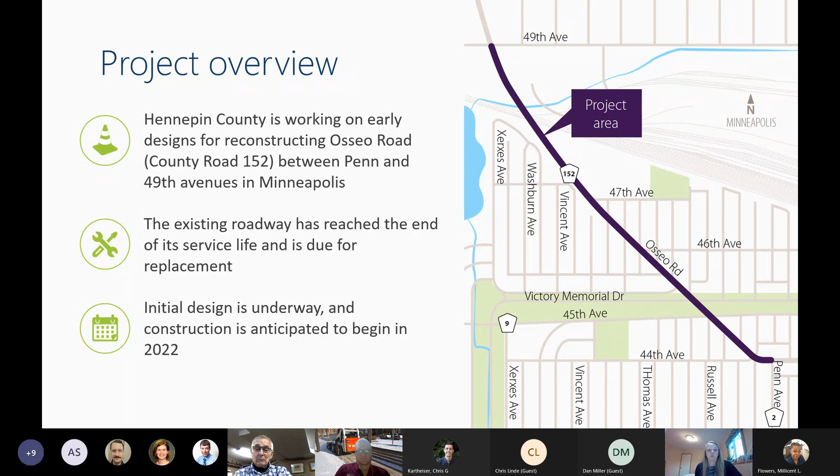The initial design, which was developed based on community input and technical considerations, was presented back in July via virtual open house and here at the August BAC meeting. After reviewing some of the feedback that we received from the community and working with our project partners, we have made some modifications to the typical sections and the geometry, which I'll be presenting to you in these next few slides.

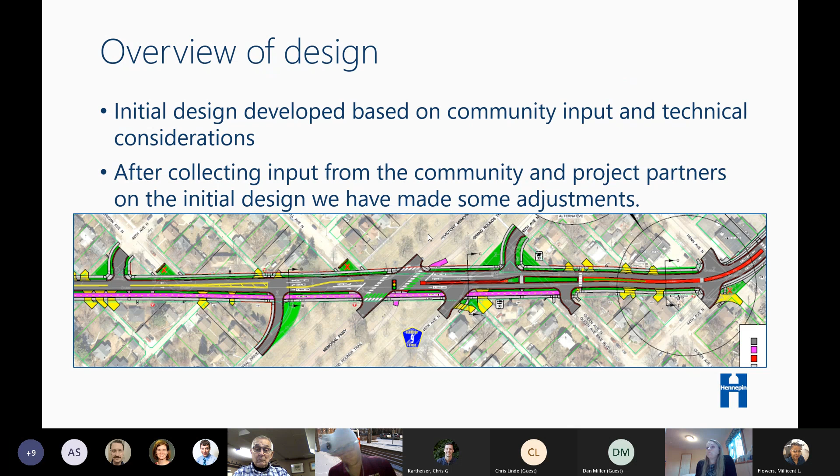With Osseo Road being a very diverse corridor of businesses, residential, and the regional trail, we kept the corridor separated into 6 major roadway typical sections. The major change in our typical section is that we are transitioning to a single trail on the west side and adjusting to 2 sidewalks along either side of Osseo Road.

Next we'll jump into some of these typical sections. Starting on the north end, this left typical section, we are matching into the existing roadway with 2 11-foot travel lanes and both left and right turn lanes at the 49th Avenue intersection. The part that is changing: we have two 5-foot boulevards. We are providing a 10-foot trail with a 6-foot sidewalk with a 1-foot detectable edge between them on the west side, and a 6-foot sidewalk on the opposing side.

On the next section, the right typical section, this is our bridge typical section. We are keeping the 2 11-foot travel lanes with outside 5-foot shoulders, which is unchanged from our original geometry. What has changed is the 10-foot trail with the 6-foot sidewalk, the 1-foot separation, and on the opposing side, again the 6-foot sidewalk.

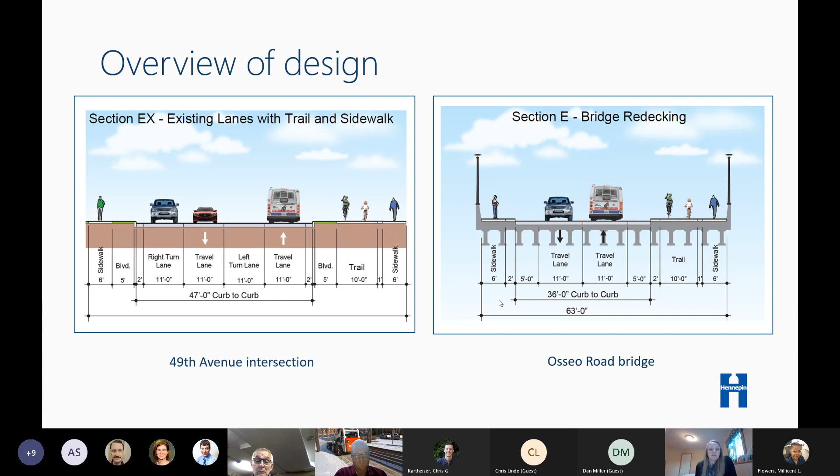The next section is our main roadway section, this highlighted green piece. Here we are replacing the in-place 3-lane section and outside bike boulevards with two 11-foot travel lanes, same as the previous design. What's changing is the two 5-foot boulevards with the 10-foot trail, 6-foot sidewalk with a 1-foot separation, and on the opposing side the 6-foot sidewalk.

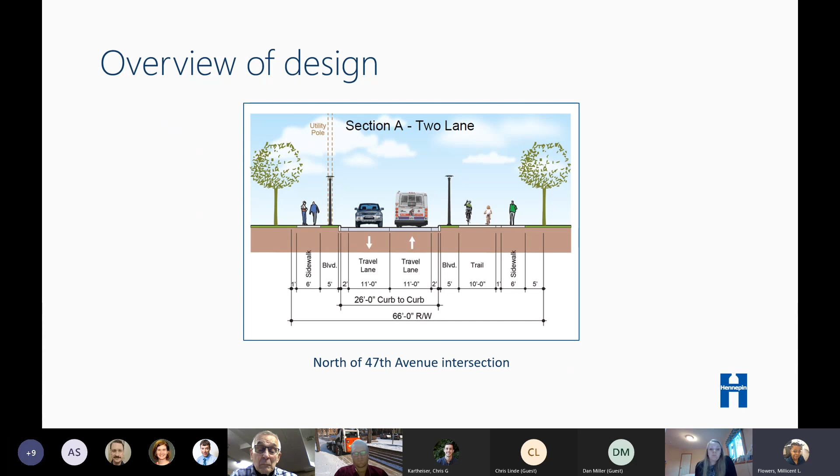So the next section we'll jump into is the B and C section. The left typical section transitions to the 3-lane section with the left turn lane at the Memorial Drive and Russell Avenue intersection. The roadway remains the same. The adjustment is the 10-foot trail, the 6-foot sidewalk, and the opposing side also has a 6-foot sidewalk, and then the 5-foot boulevard, which was previously 7 feet.

On the right typical section at the Victory Memorial Parkway and Grand Rounds Trail intersection, we introduced the raised median to define the left turn lane and for additional ped and bike safety. The part that was adjusted is the 10-foot trail with the 6-foot sidewalk with a 1-foot separation, and then the opposing sidewalk on the adjacent side.

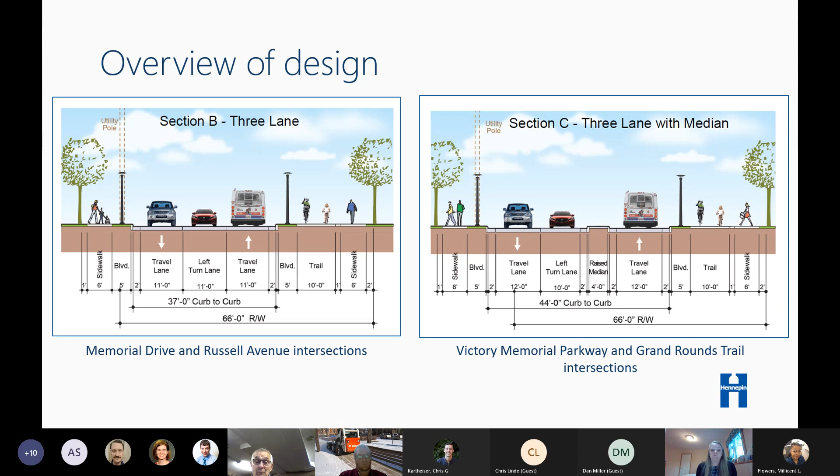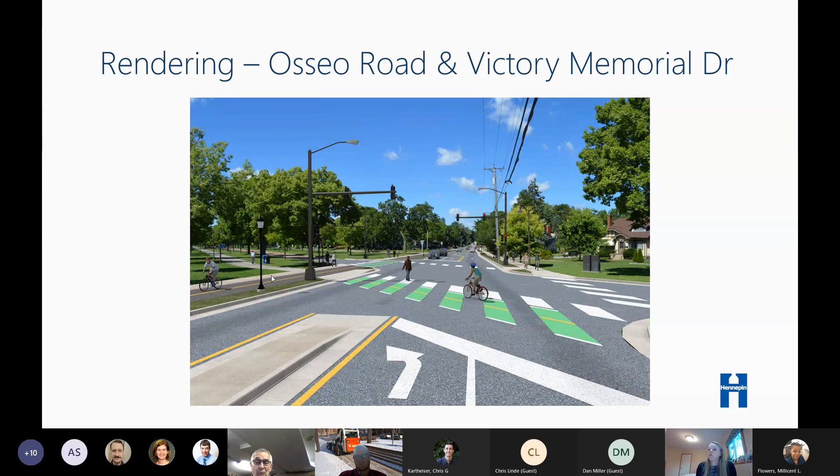Here's a rendering of this section. We are looking north at the Osseo Road and Victory Memorial Drive intersection. At this intersection, we are showing the new proposed signal, the proposed median, and the new bike and ped crossing. You can also see the trail and the walk on the west side, and the 6-foot sidewalk on the east side. So the last section we'll go into is from Queens Avenue to the Penn Avenue intersection.

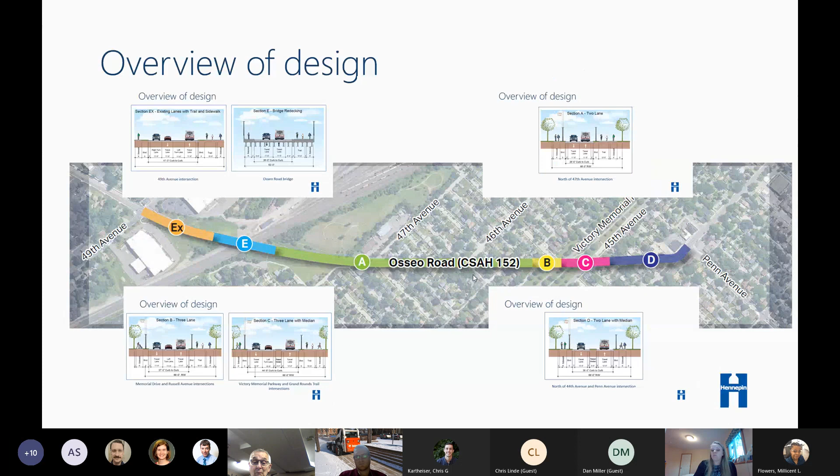At this section, we continue the 12-foot travel lanes and the raised median, with only the 6-foot sidewalk on either side and the 5-foot grass boulevard. We end the 10-foot trail at the Queen Avenue connection into the Minneapolis Queen Avenue Bike Boulevard.

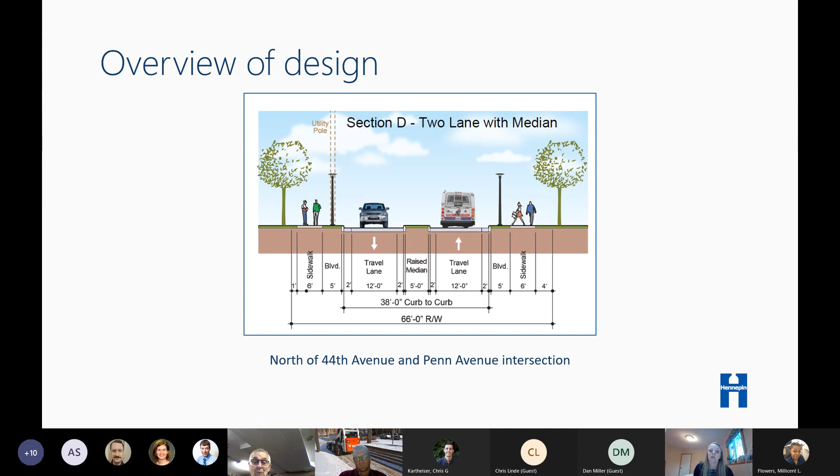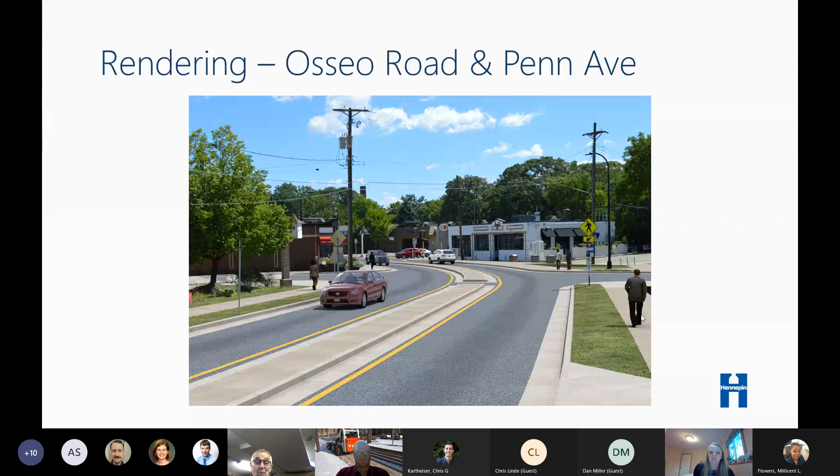Here's a rendering again of this section. We are looking south at the Osseo Road and Penn Avenue and 44th Avenue intersection. In this rendering, you can see the continuous raised median, the 2 travel lanes, the outside grass boulevards, and the 2 sidewalks, 6-foot sidewalks on either side of the roadway.

Thank you for letting me come back and update you on the proposed layout and sections. Feel free to visit the project website. Also shown is my contact information. And with that, we can open it up to questions and comments. We can either run back through the presentation, or I have the layout as well. I think we'll just move to the layout when we need to.

Nick, do you have a question? I don't have a question.

I'm going to start with a negative comment, because I'm definitely unhappy and upset to see not just 11-foot travel lanes, which I can deal with. I know we're talking about getting smaller, but 11+2s and 12+2s, my mind is a bit blown that we're still looking at that much space, knowing what that vehicle width can do to speeds. The trail looks good to me, but I know some cyclists are going to end up on the street, and wider distances are going to encourage speed. I won't be supporting a resolution that has an 11+2 and a 12+2. So that's it.

Some of the reason we have the 11-foot travel lane is due to the proposed D line and C line, the Metro bus BRT that runs along the corridor. Their recommendation is the 12-foot lane, along with the 11-foot lane, along with kind of a county standard for us to do an 11-foot lane. In the median sections, due to snow plow widths, we need a minimum of 15 feet plus for our snow plows. So we are kind of limited on the minimum width we can put through those median sections.

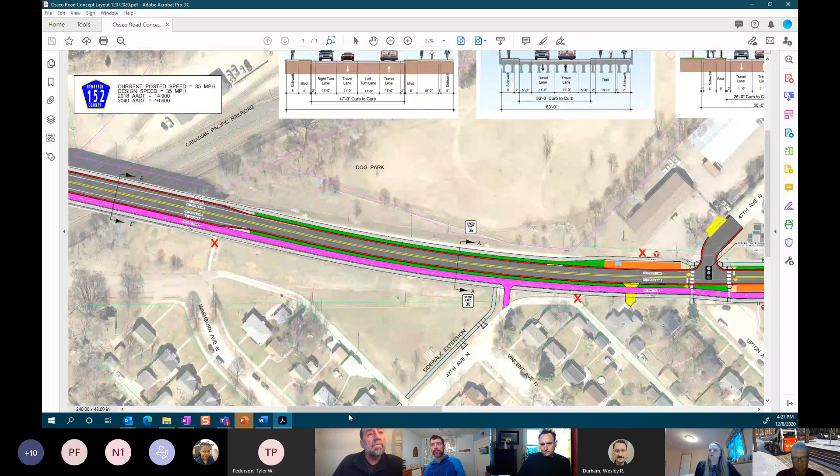Yes, yes. It switches to an on-road bike facility when we get to 49th Avenue at this piece, so it switches from off-road to on-road. They have on-road bike facilities—there's a trail up there that goes all the way over 100 and continues up to Bass Lake Road.

Part of our project, we won't do this. Also Brooklyn Center that goes up there, so I don't know what they have for this striping will also become part of Minneapolis maintenance agreement that we'll have to discuss with them. So I don't believe that striping will continue.

Part of this is continuity and really being able to give bicyclists an understanding that this is truly a bikeway that goes someplace. That's been a problem when we build projects with a bikeway that is undersized and doesn't have any wayfinding on it, no markings, and it goes unused. If we're going to encourage people to use these trails, we need to support it so that people actually realize it's a bikeway.

And so to stop this at the Minneapolis border and then to continue it on another, I think it's over a mile and a half up to Bass Lake Road. It's on the other end of the Shingle Creek crossings. Would be a real disappointment. So my recommendation, and if I were to write whatever resolution to help you folks out, would be that that be extended all the way up there to give people an idea that this is a continuous trail that goes there.

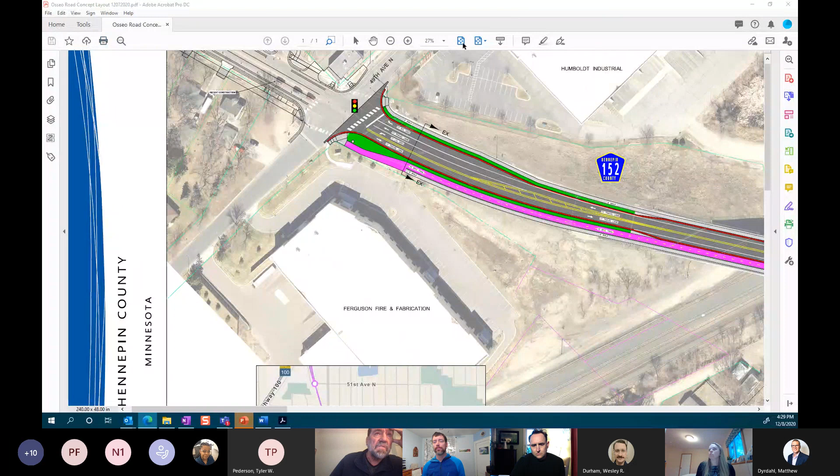So it's proposed. So what happens after this? We're seeing this, we're excited about it, but listening to the reasoning, this might not appear yet. We're seeing it in the drawings. Is that correct? In other words, we may not see pedestrian lighting, we may not see dashed lines on the trail.

Right, I mean, we're at 30% concept level, so things do change. Our intent is to put the striping in. Our intent is to use pedestrian level lighting, but we're at a 30% design as well too.

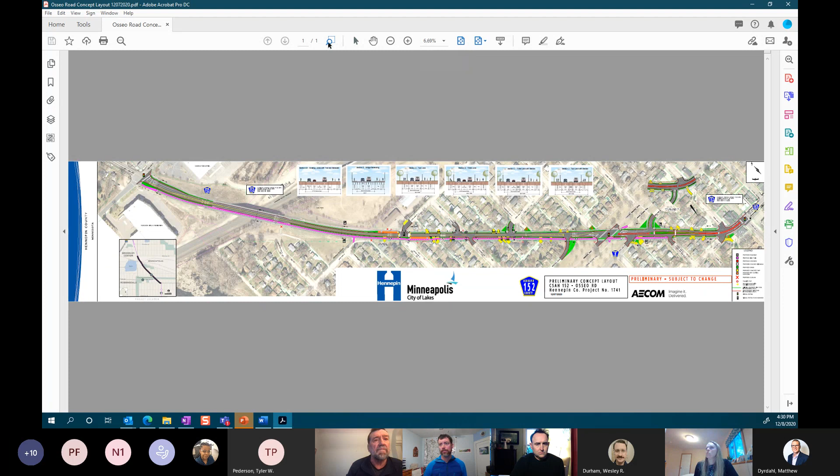I find those to be very exciting additions that make this a more welcoming experience to ride along a road that's been kind of a miserable road to ride along. So along with the greening that Tyler was talking about, these are important things to encourage people to use this trail. Something that's missing at intersections, and if you scroll down to one of your elevations, I think...

Well, yeah. At one of the intersections, are you talking? Hang on for a second. Let me see if I can.

Well, that's just fine. What I was looking at is when the trail crosses the different streets. So you have Thomas on the right side there, and you have a few others. We just had a conversation about Vision Zero and decked, tabled intersections and marked intersections, and I would hope that that would be a consideration as well here to again provide some continuity on this trail.

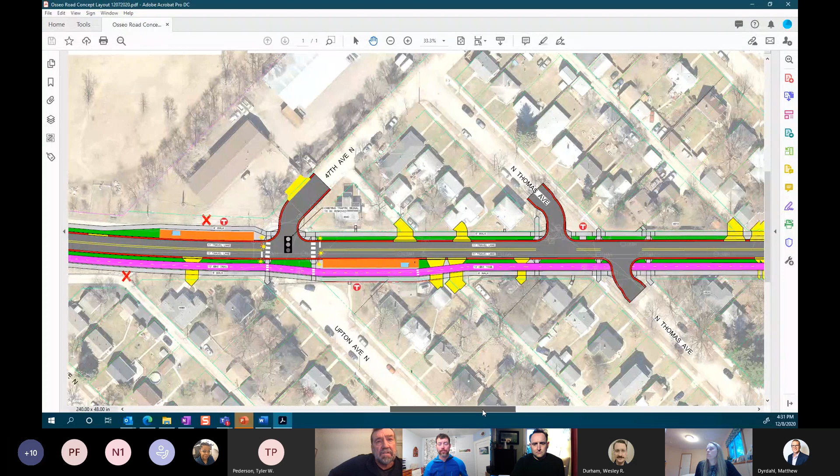Along with what Matthew had to say, I think people are going to, whether you like it or not, continue to go to that intersection where there is retail. And so you're going to either have bicyclists in the lane, or we design something so they can get there safely. They aren't going to divert and go up Queen and go around the corner to get there. They're going to go straight up.

There's one more item that... I'm losing my thought, thank you. I'll come back if I can think of it. But thank you, right, these are just some considerations.

Cadence, did you have a comment? Your hand is raised. Hi, yes, I'm not sure if I missed it during the presentation. Thank you, Amber, but I'm just curious if you could speak a little bit more about the 45th Avenue and Osseo Road interaction there. It looks like if you're approaching Osseo from the east, that you're basically forced to take a right. Am I reading these correctly?

To go on to 45th? I'm sorry, say it again? No, so like if you were on 45th and you were headed west and you get to the intersection with Osseo, it looks like you have to take a right. Like you can't go straight across on 45th like you can now. I was just wondering what the rationale was for that.

Yeah, so you're correct, it is only a right turn, kind of a right in, right out situation. So most of it stems from our Victory Memorial Parkway. We have queuing issues, concerns that come up when vehicles will queue up here to go into the left lane. So essentially they are blocking, on some accounts during peak hours, the 45th Avenue intersection. So some ways to help with the queuing and safety for those people who tend to take risky lefts out of that intersection when they're having to wait, we kind of put in that median to reduce that conflict point that's there.

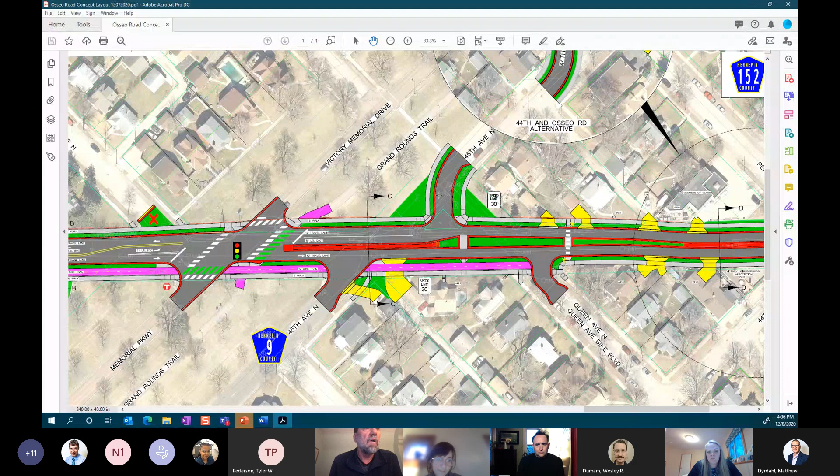The other piece that I think is really important to see the next time you come around is what's going on with wayfinding. Where do you go on this thing? How do you know what information tells you that the Queen Bike Boulevard is there, or how far you are from Penn Avenue to Bass Lake Road or stuff like that?

I think having a package that talks about wayfinding and what you're actually going to be viewing here to promote biking, to give people who may not be going an advanced distance but a mile, which is a big deal, a way to see those successes, would help. We build a lot of projects here without much wayfinding that helps people find stuff, unless they just go out and explore it by happenstance. Some of that would be really helpful.

So thank you, Amber. I think wayfinding is something we've definitely heard is an important piece. I don't know if that'll be done at 60%, that's typically something done closer to 90%, but it's noted.

It would just be important to push on this, because we don't see it otherwise. My observation in Minneapolis is that we reconstruct a street with a bike path on the side that's supposed to have striping or something, and it takes close to two seasons before you actually see it happen. So being able to open up a new reconstruction with a full menu of what's happening for all users would be really helpful.

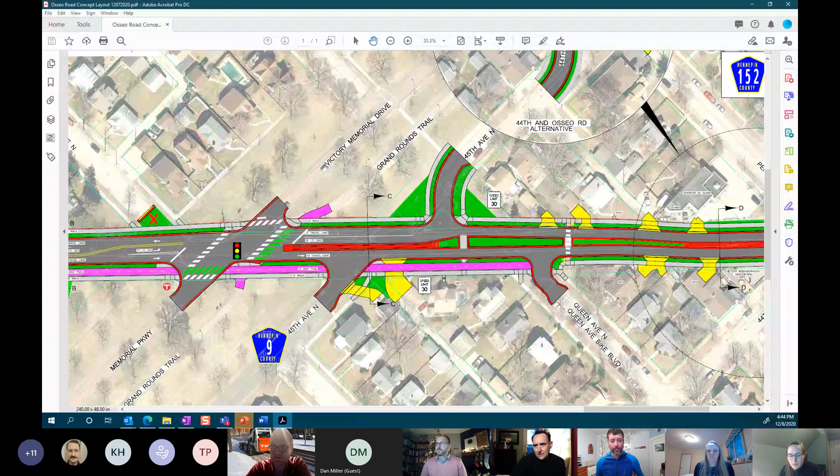I proposed wording in the chat for the middle section, which was: the BAC finds the existing lane widths of 11 plus 2 and wider are unacceptable. These widths are proven to encourage dangerous higher speeds and need to be reduced. I don't have the wording for the other ones, I'll let somebody else take a stab at that portion.

I think we don't have time to wait this out till we get the exact wording on this whole motion, but I'm going to try to put this together once again. Is there any further discussion on this motion? We good? Speak now, I'm not trying to discourage discussion, I just want to make sure there's no further discussion.

Okay, so we have a motion: the BAC appreciates staff for the curb protected bikeway facilities. Number 2, to Nick's language on lane widths. Number 3... and again I forget the third one, dang it, come back at 60%. The fourth is the tabled crossings. The fifth is support for, or appreciation for, zebra crossings and pedestrian lighting. And 6, would like to see a continuation to Penn.

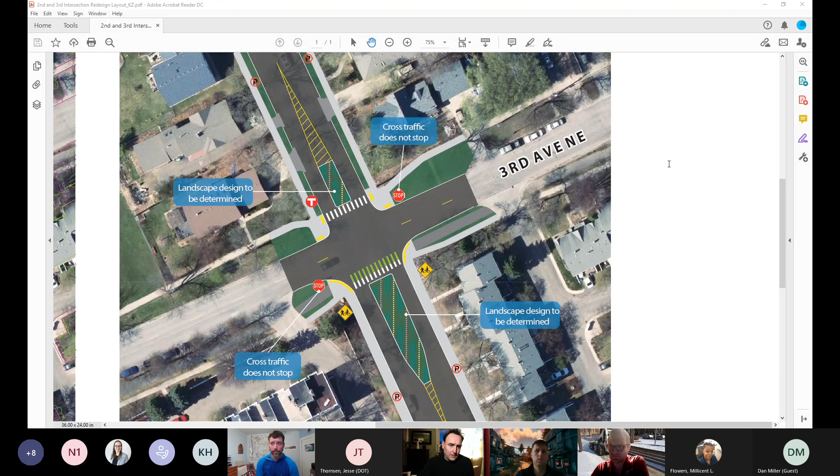All right, I'm going to propose the motion that the BAC supports the plan as presented, with a special request of City Public Works to determine ownership and maintenance of the 3rd Avenue Northeast bike path or greenway for future improvements on that property.

Anybody have a second for that, or want to make any amendment or change of wording? I would second it. All right, as seconded, motion made and seconded. Any further discussion?

I just want to clarify my comment. It was largely, I want to be consistent as we're looking at things, but my bigger picture reaction is that I think it's amazing, and I would love to see a lot more of these around Minneapolis. So thanks to the staff team for your work on it, and I hope it becomes a really common precedent. As somebody said, this is right down my street and it works really well.

So hearing none, we're going to go ahead. Oh, wait, I have a question or comment, and that would be to perhaps add in your language: BAC supports the plan as presented with Public Works to determine ownership of the 3rd Avenue Trail and to consider adding it to the AAA network.

We need to clarify just briefly, it needs to be ownership and maintenance. We know who owns it, it's in the right of way, but we don't know who's supposed to maintain it. I think the wording could be take ownership of the maintenance. Right, because that's different than owning, like you said, it's in the right of way, but anyway.

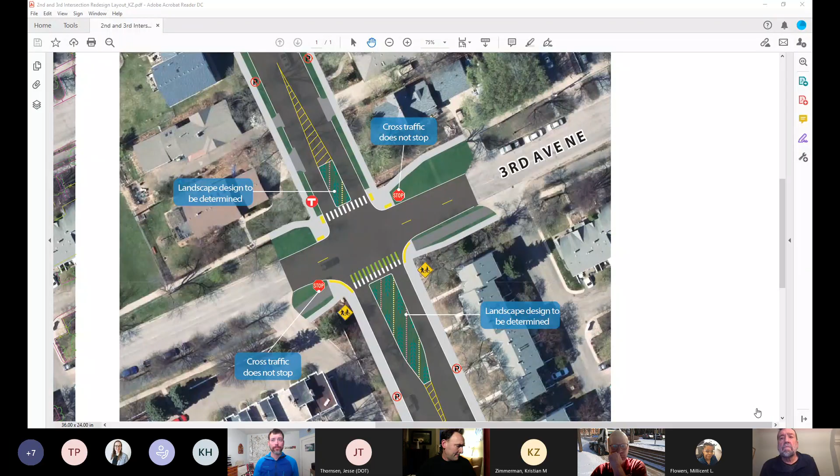Hey everyone, Amy Morgan here. Let me share my screen real quick with all of you. So I'm here to talk about the West 31st Ped Safety Improvement Project happening at the intersections of Emerson Avenue and DuPont Avenue. This is for 30%, so as you probably remember when I was here previously, just a little bit of background.

Back in 2013, the Public Works Department installed temporary bump outs at each of these intersections with painted curb extensions and plastic delineators or bollards. As you can see in these images below, this is what currently exists today, still out there. So in 2021, we're looking at upgrading this infrastructure to do permanent curb extensions and pedestrian improvements at these two intersections to enhance that crossing.

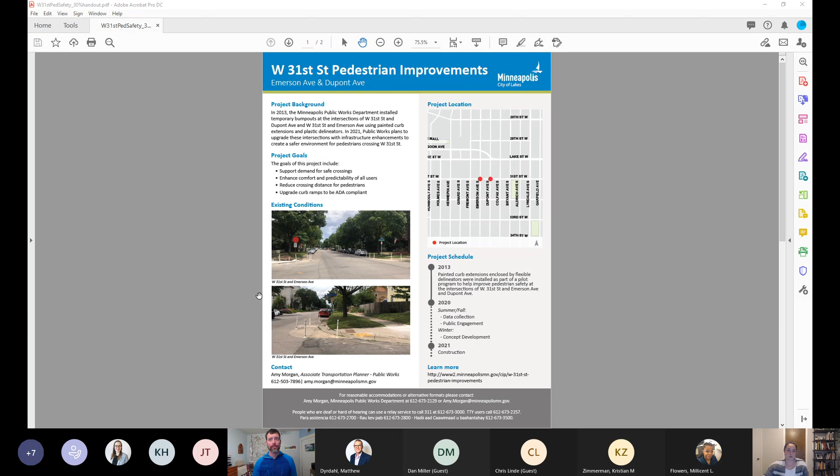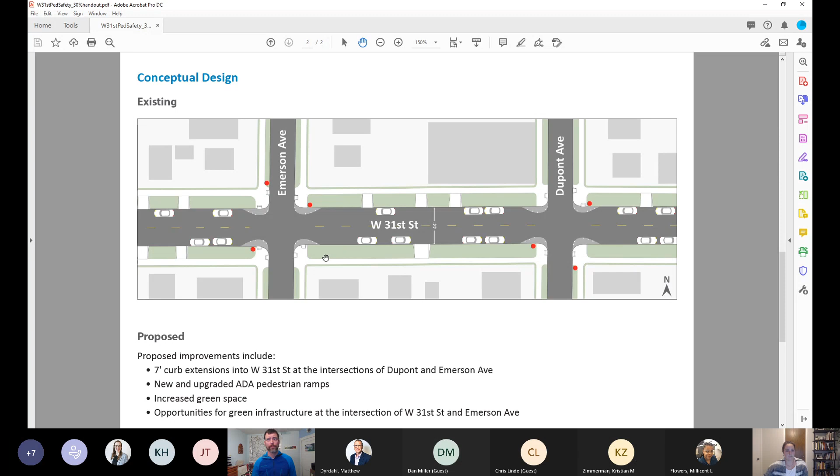Reducing that crossing distance as well as upgrading those pedestrian ramps to be ADA compliant. So looking a little bit closer at what's currently here, or what's not here I guess, you can see where those temporary bump outs currently exist. There are 4 different locations, 3 at DuPont and 1 at Emerson. There's not even an existing curb ramp or any sort of curb cut, which makes it extremely difficult or impossible for people in wheelchairs or other mobility devices to cross at these locations.

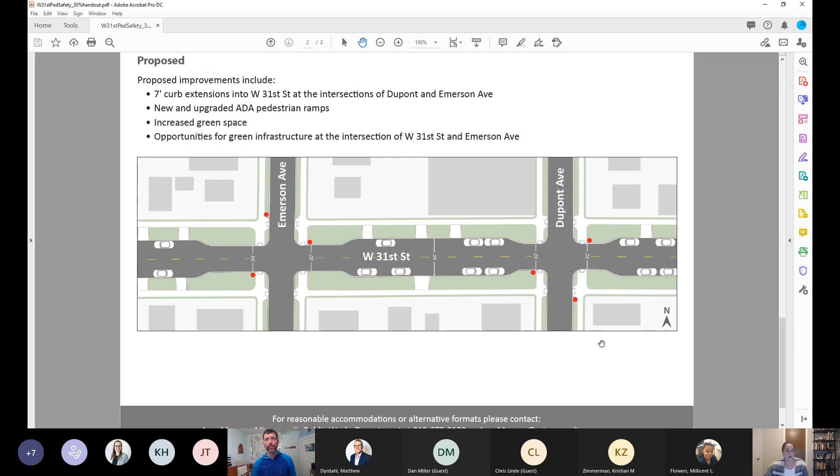So as part of this project, we're looking to make those curb extensions permanent, as I mentioned. Also adding in curb ramps where they do not currently exist, as well as upgrading all of the other pedestrian ramps to be ADA compliant. These curb extensions are 7 feet, similar to what is out there today. They are a bit longer in length, however.

This project, the proposal here, offers increased green space as well as some opportunities at Emerson Avenue specifically for green infrastructure improvements there. One thing I want to note is that West 31st Street is identified as a future bicycle corridor in the Transportation Action Plan, and I'll just note that these curb extensions will not prohibit any sort of future bike infrastructure along here. So I'll make that very quick, I know we're a little behind on time. I'll open it up to any questions or comments you guys might have.

That's a good looking road. Anybody else have any questions?

I have one quick comment. The project looks good to me. The one thing I think that's an opportunity, if we're making changes to the curb lines, is to also narrow the crossing distances in the east-west direction, so at Emerson and at DuPont, if you're crossing each of those. So I'd request that be added to the design so that all 4 crossing directions get improved.

Yeah, I'll note that we did explore that, and when we looked at the cost estimates, it was just not realistic with the budget we have for this project, unfortunately. And so those are one-way streets currently, DuPont is one-way northbound, Emerson southbound. We do hope that the speeding happening on West 31st Street, the bump outs will help slow down traffic there and allow pedestrians to be a little bit more visible. So we did look at that, but unfortunately due to some costs, it realistically is not feasible with this project.

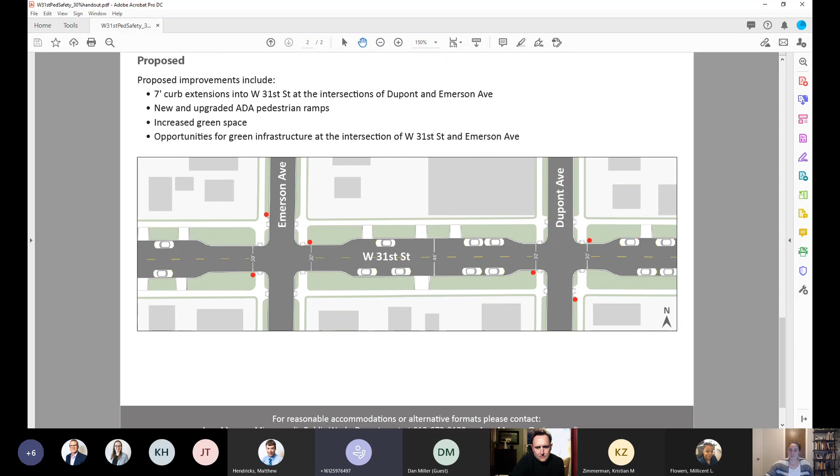Franklin Avenue, Franklin West. Hi, my name is Katie White. I'm going to pull up my screen, although I'll give you a heads up, it sort of takes a while to load when I try to share it. I also have a 2-year-old in the background who's very excited about vacuuming and asking my husband to vacuum, so I'll give you a heads up that that might be what you're hearing.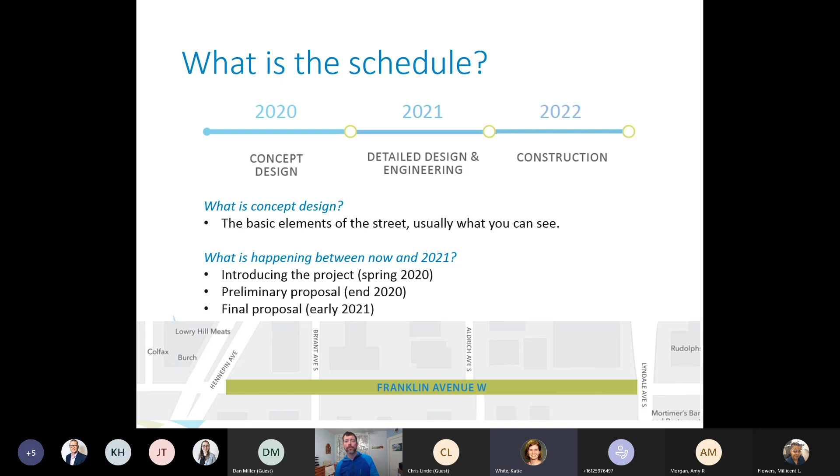We did engagement over the summer using an open house, neighborhood meetings, and online surveys, and we actually got really good feedback on the online survey. I was very happy with that, showing a strong interest in improving the environment for walking and biking. We did a prioritization exercise on Survey Monkey, and walking was easily #1, biking was a close second. Concern about safe travel along and across Franklin, improving transit, corridor greening, speed reduction for vehicles. We did get some comments about parking and car access because it's a dense residential neighborhood on both sides of Franklin.

A lot of comments were colored by the pandemic and this takeout curbside pickup culture and concerns about using transit. So this is the primary graphic I'm going to be referring to. I'll do an introduction to the graphic, then walk through the features you're going to see here. You see a bicycle facility in this dark gray - this is the black ice concrete treatment folks are familiar with. You see boulevard space in light green, sidewalk space in a traditional concrete color. I'll call out that this transit stop is in the wrong location - pulling the transit stop closer to Bryant here is part of it - and otherwise driveway access and everything. This #1 here in the middle between Bryant and Aldrich is the location of this cross section that you see across the bottom.

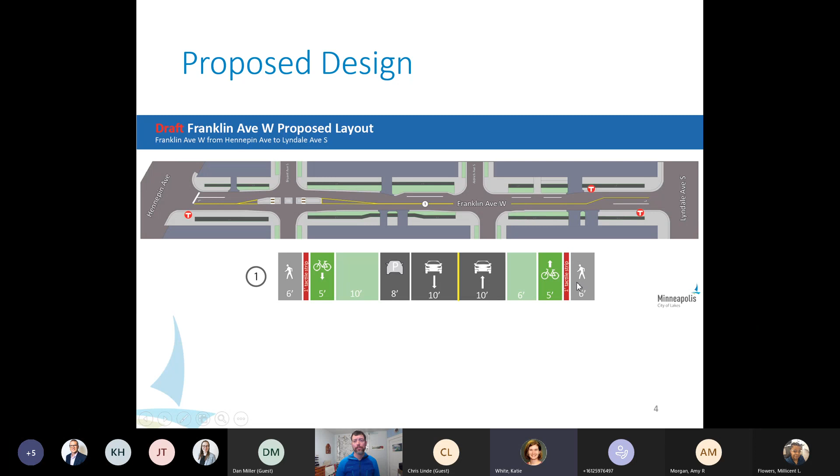You know, the bike facilities in green, even though it would be in black ice, hopefully this is on the north end - ped, bike, boulevard, car space - and then this is the southern end. So that's how we'll look at this graphic.

So we have some new components, and I'll go through these pretty quickly, then I'm happy to take comments. Looking at the median at Bryant Avenue, making some changes, adding green space on most block segments, more comfortable pedestrian space, a behind-the-curb bicycle lane on each side, improved bus stops, and retaining 5 parking spaces in the corridor.

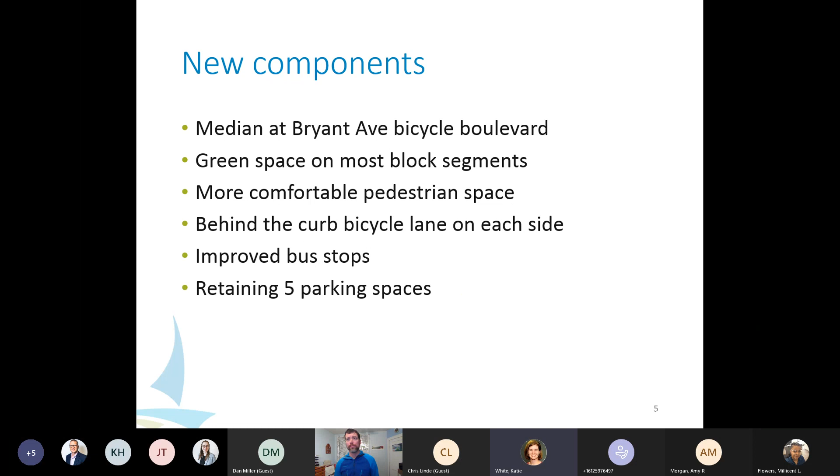First is the median at Bryant Avenue. Bryant Avenue is designated as a bicycle boulevard today. To the north of Franklin, Bryant curves around and turns into the Loring Greenway. It's a highly trafficked bicycle corridor, about 1,200 bicycles per day coming through here. Today this median treatment exists in the far western part, and the far eastern part is basically what exists today with plantings.

So what we're looking at doing is making it a more substantial feature, including this in the middle, which is a mountable median for emergency vehicles, but it essentially blocks all left-turning traffic for cars. Bikes and peds can make all movements, but not vehicles typically. So that is a big change. We are also currently showing this as all concrete because of maintenance questions, but that's something we're looking at taking more feedback on in the next stage.

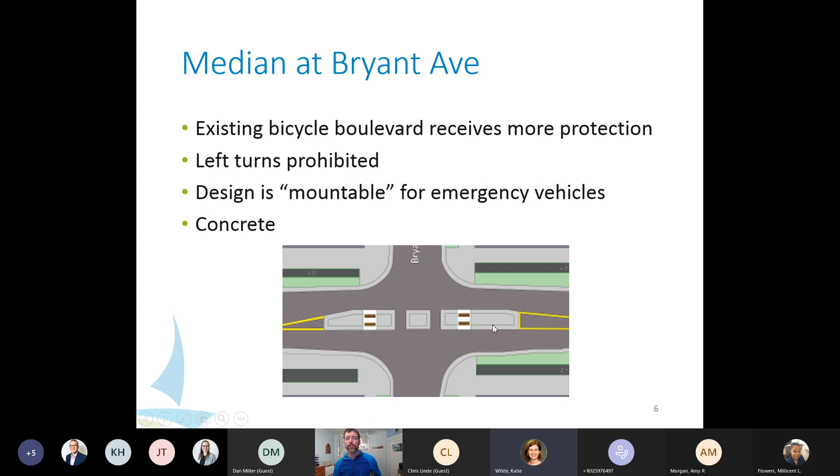The off-street bicycle facility gets the dark gray black ice treatment, 5 feet wide in all locations. It doesn't get narrowed at all. It's behind the curb, at sidewalk height, adjacent to the pedestrian space and the boulevard space, so it maintains the 2-foot clear zone on both sides of the 5-foot bike lane.

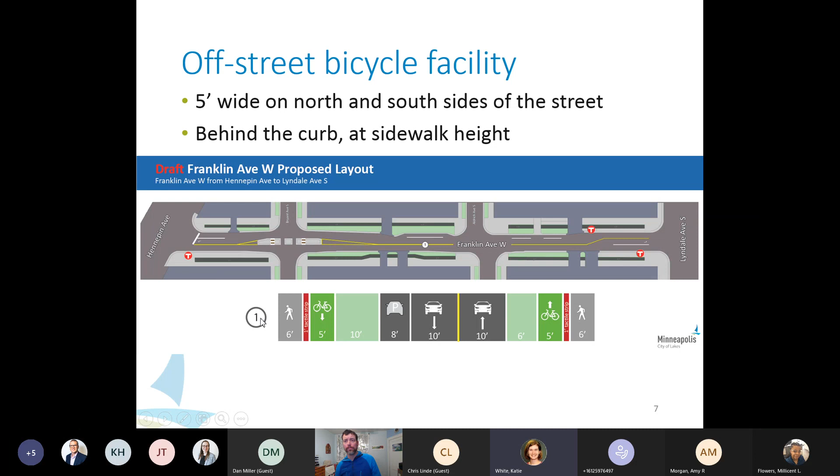Adding green space to most block segments. Currently there's no green space at all - the sidewalk goes back of curb, so there's no grass. Usually when we look at planting trees, we look for a minimum of 3.5 feet in order to put a small fruit tree. But in this location, where the number 1 is, we're at about 10 feet of boulevard space, and that gives us the opportunity to potentially put some larger trees in. It hasn't been determined how many or what species the tree would be, but I think this is going to be a dramatic difference for the experience along Franklin from what it is today.

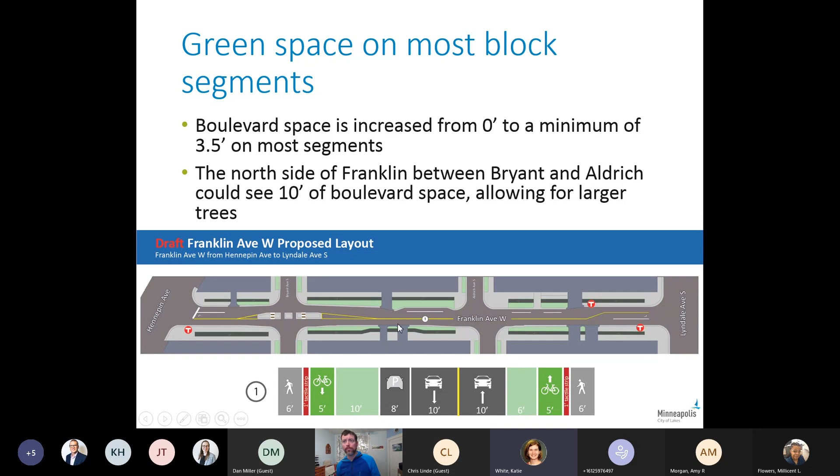Again, more comfortable pedestrian space. Sidewalk will now be at least 6 feet wide in all locations. I think as you get closer to Hennepin, it's going to be 8 or 9, much wider. Right now we're showing a 1-foot tactile buffer strip between the pedestrian space and the bicycle space. It's visual - not a bright red, but a rusty red, brick red, with almost a truncated dome texture to prevent unneeded or unsafe mixing. And the pedestrian space is now mostly against the back of the buildings, not on the curbs like you see today.

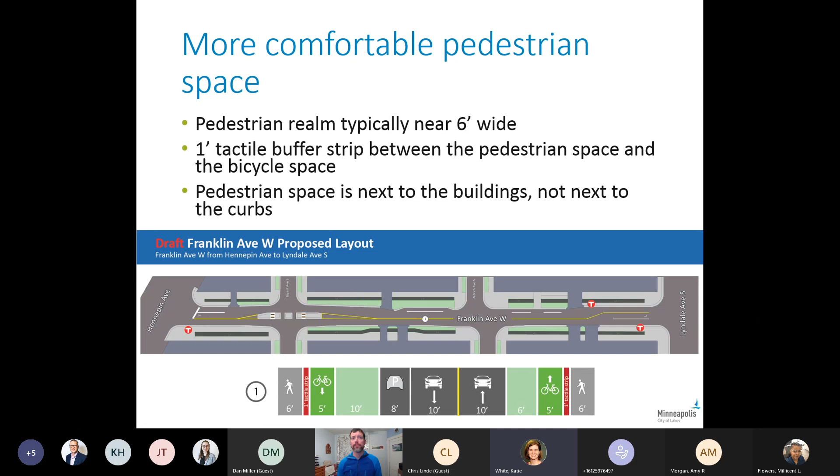The bus stops is also a really important upgrade here. Currently on Hennepin Avenue, there's 1 bus shelter that's diagonal on the corner, meant to serve Route 6 customers traveling on Hennepin Avenue and Route 2 customers on Franklin. The pole is actually over here, and right now it's just a pole, but it looks like we can fit a standard size Metro Transit shelter here on Franklin, looking at adding electric or other services inside the shelter to improve the customer waiting experience.

This is the start of Route 2, so it does get a high number of boardings. This side of Lyndale and the southwest corner of Lyndale will also have a shelter, but on the north side of Franklin and the northwest corner of Lyndale, since it's the end of Route 2, there's no one really waiting for buses here, so we're maintaining the signpost with a bench that currently exists today.

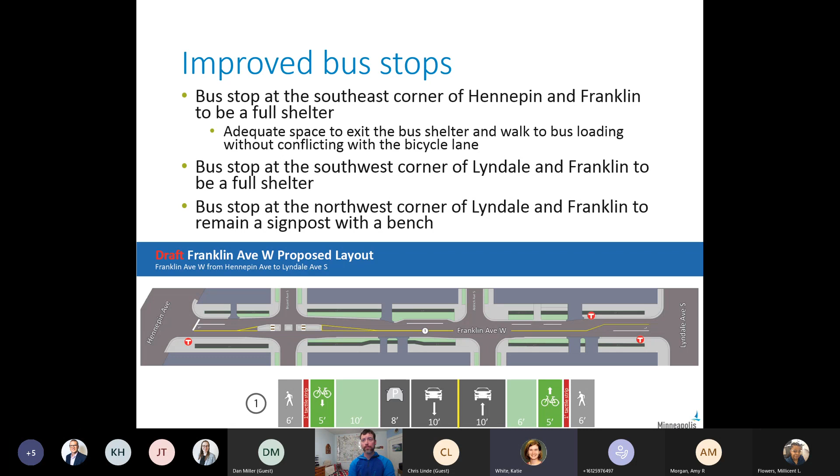We are retaining 5 parking places on Franklin through this project. 3 of them are in the space here, this parking bay, which will accommodate 3 vehicles. Using the bay pulls the cars out of traffic a little bit, giving a more protected experience for all users. Then there's 1 parking space on the east side of Aldrich, and another one here, for a total of 5.

Currently, there are a variety of parking restrictions on Franklin - daytime, weekday evening, and weekend are all different. Not sure yet what those restrictions might be.

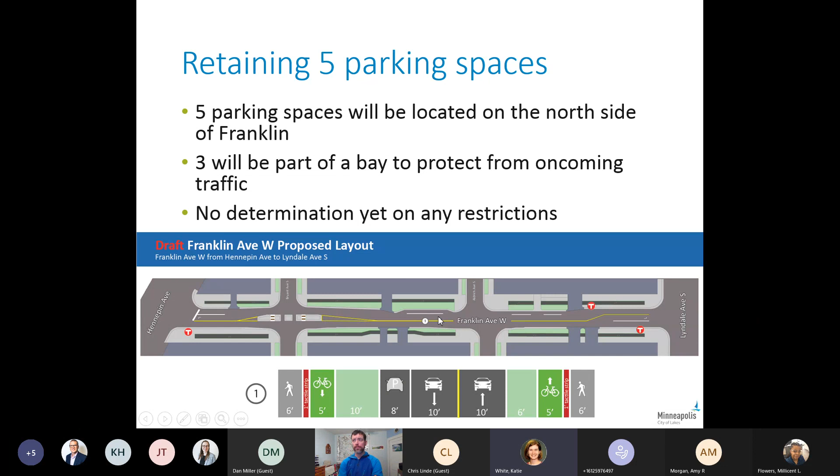So that was me going very quickly through the design, but I really want to spend most of the time on your questions and clarify anything that needs more information to help inform your comments.

Looking good, looking good. Anybody have any comments? Questions? I have a question.

This looks great. Super exciting to see, especially I just pulled up the existing conditions on Street View while you were talking, just to remind myself since I haven't been there. Great work. I had a question as someone who bikes on Bryant pretty frequently as a route to get downtown. I know between Lake Street and Franklin, even though it's super narrow in there, a lot of times there's vehicle traffic that I imagine is probably coming from Franklin to get to Lake Street, bypassing Hennepin, and they go fairly fast given the conditions.

I just wanted to throw out there as an idea to consider if there's a way to cul-de-sac that north end of Bryant at Franklin, using maybe a mountable curb like you added for the median, and some grass or something to make it appear not mountable. Just something along those lines, just to discourage that through traffic along the bike boulevard.

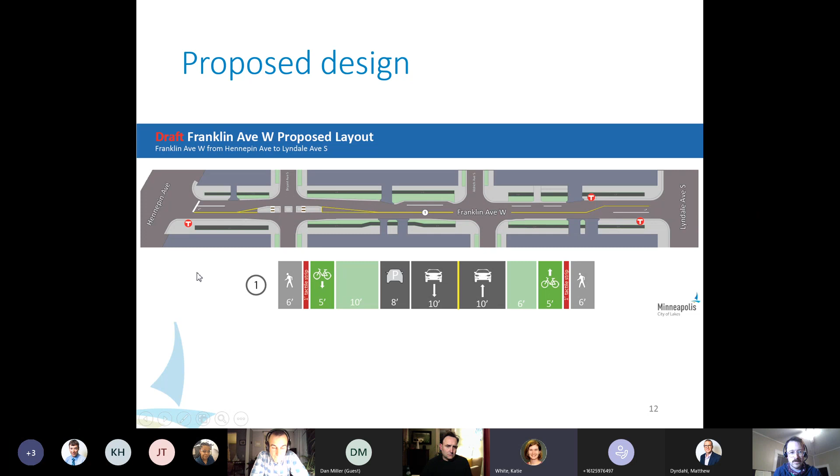I'm going to share my screen real quick, since I heard Wes isn't quite familiar with what that might look like. At 40th Street and Cedar Avenue, it looks like this, and you can see the openings there. It's enough for a typical Bobcat to get through, which would be the vehicle type for winter maintenance.

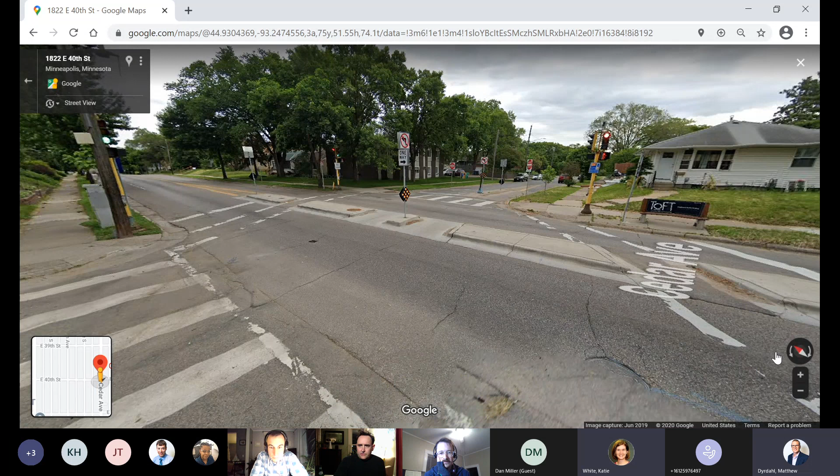Sounds great. Jesse, did you have- I'm sorry Wes, are you finished with your comments? I'm good. Jesse, did you have your digital hand raised? Yeah. The trail on the south side has a bend-in treatment along those 2 driveways, but there aren't really any bend-in treatments on the other driveways. I was wondering if there's a specific reason for that, if there's utilities in the way or something.

Yeah, I just had a meeting about that this afternoon, and I think this is something that's probably going to change by 30%. There's currently an encroachment on this side of the street, and I think I'm going to be getting guidance to remove that encroachment and make this bike path straighter. Great, thank you.

Cadence: I just wanted to say thank you for this design, it looks really great so far. I used that Metro Transit stop over by Hennepin regularly years ago, and it was a bit of an issue. I'm happy to see that has been considered, and this is further proof that bike facilities can also complement other modal users. This is a really good example of that, so thank you for all of this consideration.

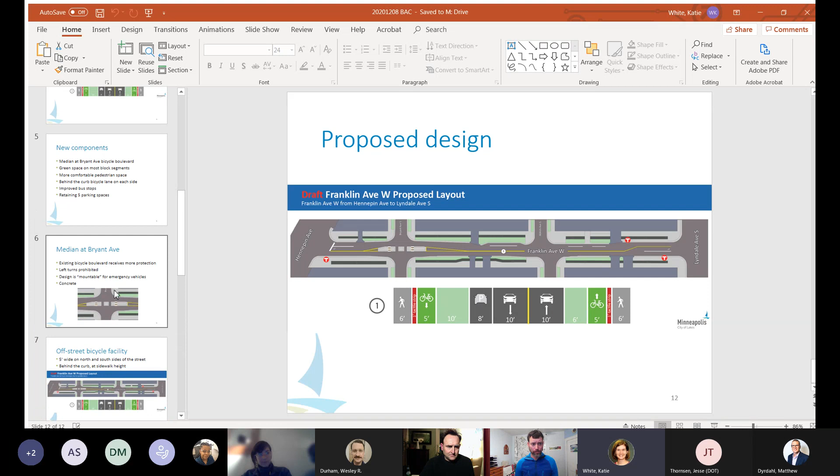Yeah, let's see if I can zoom in a little bit. For the Bryant median, when we talk about whether it's mountable and who can use it, let's zoom in. This is the ending of this, and then there's this harder line. This area is sort of sloped, it's not a very steep drop off on this curb. And if you take a UPS truck, every time it makes this turn, they're going to be using this concrete. So it is pretty tight right now, but I will ask about it.

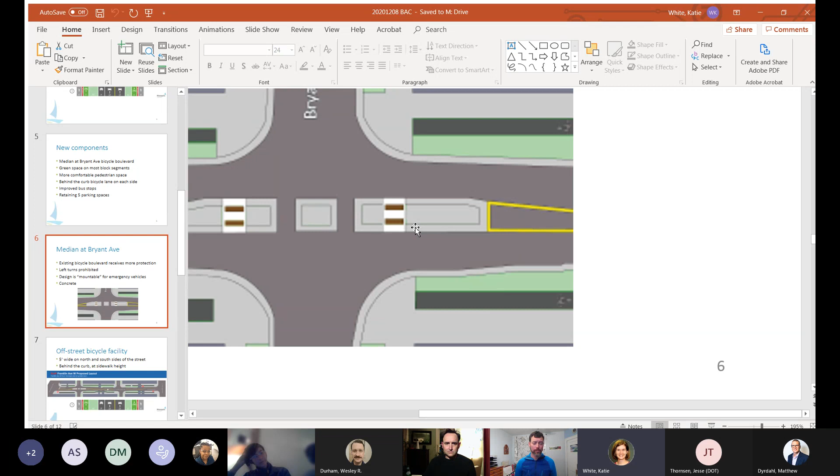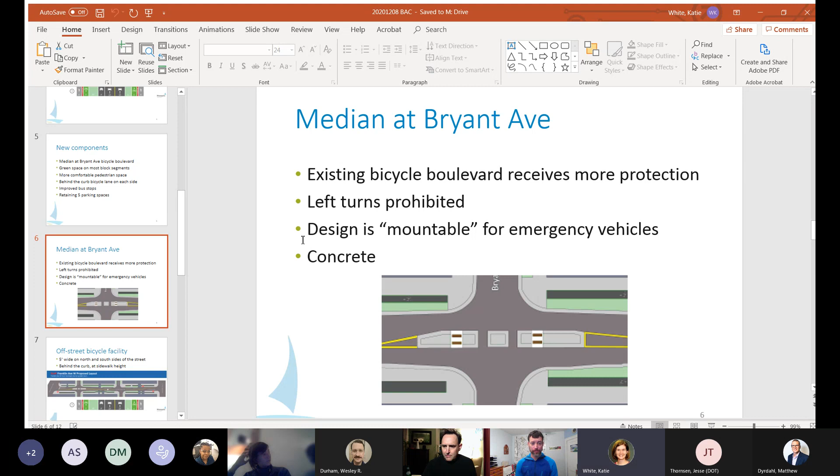Wow, this is a monumental project. It's a very important three blocks in our city. Thank you, Katie.

Would it be helpful to just say something about how we support the project at this point and look forward to seeing future revisions or future versions? I'll second that motion.

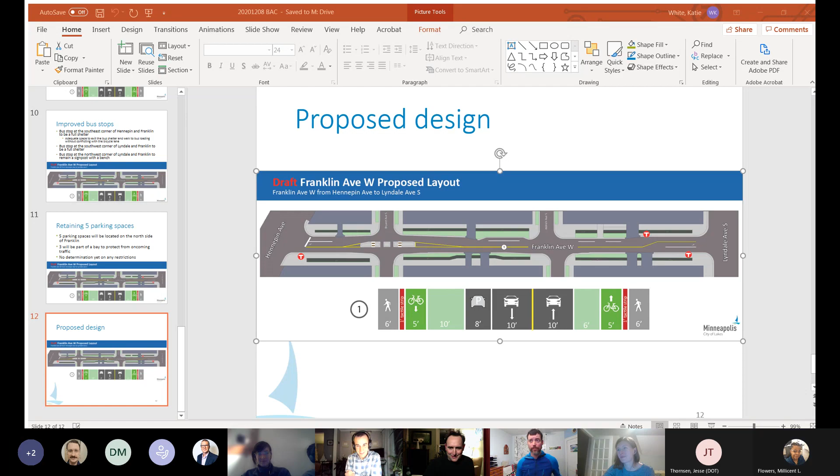Further discussion, or anybody want to add to the motion? Maybe we could add something, since everyone said we're all excited about it. Maybe we can add that verbiage in as well. BAC is very excited to support the project as presented, and looks forward to future iterations of the project.

That sounds good to me. Any further discussion? Hearing none. Millicent, can you call the vote, please?

Okay, Aaron, Aye. Chris, Aye. Dan, Aye. Miller, Aye. Georgiana, are you there? Let us know if you want to vote. Yes, I'm here. Yes. Okay, Heather? Still there, Heather? Cadence, Aye. Jesse Thomsen, Abstain. Aye. Matthew Hendricks? Matthew Hendricks? I think you're muted. I was muted. Aye.

Was that Heather that said hi back there? Okay, it was. Paul, sorry, my audio is a little weird. That's fine, I got you. And Paul, are you still here? Yeah, I'm here. I like what I see there. Aye. Okay, great. Wes, Yes. You? Yes. Great.

10 yes and 1 abstention. Thanks, everybody, I really appreciate it. Thank you, that's a lot of work. Yeah, three little blocks. Well thought out, very well done.